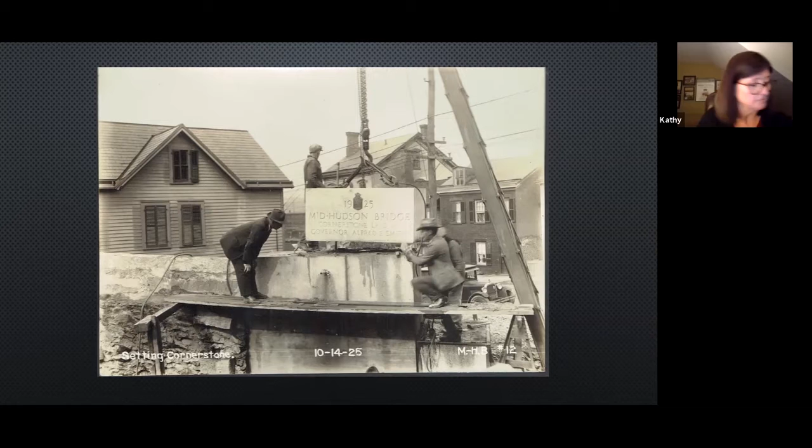This is the Anchorage on the east side of the river, just south of Kaal Rock. Kaal Rock, as many of you know, is this big boulder-looking thing, but it's enormous. They thought initially they would just have the bridge be on top of that, but they decided to move it a little bit further south.

This is a caisson, the east caisson. The caisson is used on bridge piers to build the base of the pier. What it is, it floats in. This one came in on March of 1925.

What happened was, what they do with the caisson, it's a little hard to explain, but it comes in looking like a boat, with steel sides and metal supports. As it's sunk to the bottom, there's a cutting edge on the bottom of the caisson and a false bottom. So if it goes down properly, as it sinks, they build up the sides to keep it above the top of the water. Once the cutting edge gets to the bottom, they use that to help get through all the muck, and they dig it out from the inside, because this is open on the inside. It's not a closed caisson like we think of with the Brooklyn Bridge.

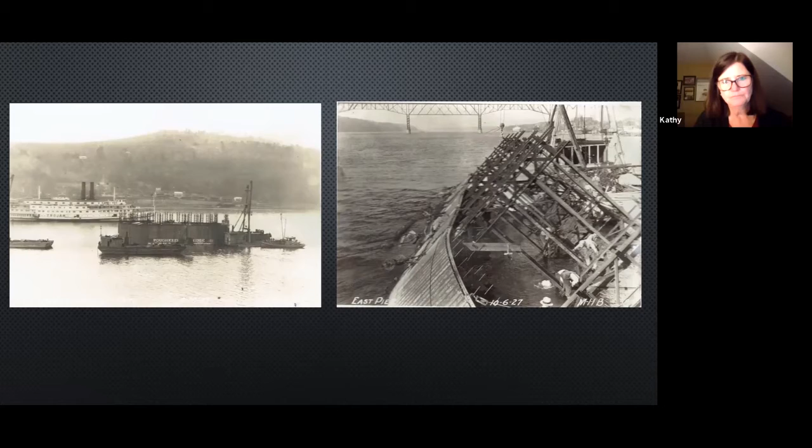So, just to back off for a minute, we have interpretive signs at all the bridges. When I was trying to describe this, I had an engineer do a diagram of it so it could be better explained. If you look at this diagram, this is pretty much what happened. The bottom of the Hudson, we all think it's like a swimming pool, but it's not. It's got all kinds of crevices and valleys, and it's not flat, obviously.

So as it goes down, the caisson had gotten stuck in here. Over the course of almost 2 years, they had to do what's called a car float here, and we have the barge on this side. The barge was trying to pull up this way, pulling that way here. In the meantime, they have equipment and men down there digging out from the inside to right this caisson. Now, this took quite a while.

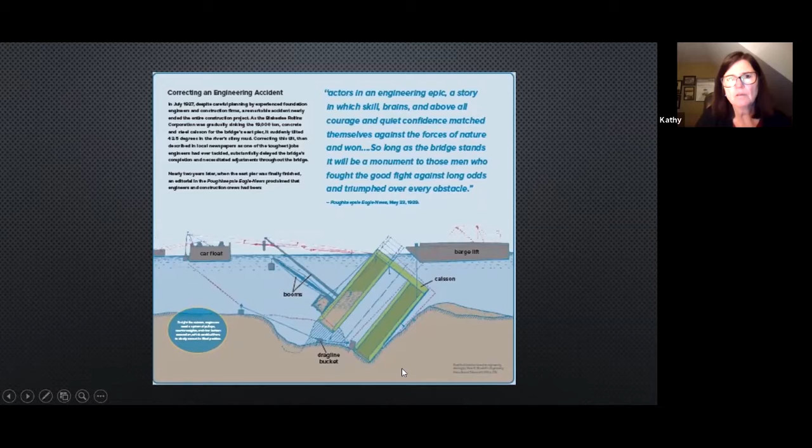You'll see that it tipped in July of '27. They had to keep pulling on it all that time through the winter, with tidal flow, river flow, ice, everything. They didn't get any movement on it until May of 1928, where they saw a slight movement. Once they saw this slight movement, they were able to keep that momentum going, so that it was pretty much straight up in August. But it took until November.

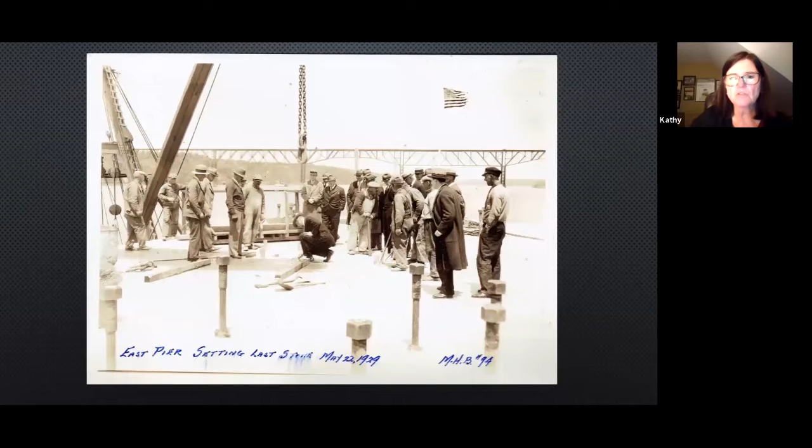It took until November for them to get it to the point where they could start to fill it again. Then, of course, it was winter with ice, so they held off until the next spring to finish it up. As you can imagine, there was a big ceremony, flag, all the important guys around, laying the last stone on top of the pier. In the meantime, the West Pier had been completed back in June of '28, so it was waiting for a long time.

But this we refer to as a Herculean effort. It was an engineering epic, they called it in the engineering review. But if they had not been able to right it, they would have given up the project.

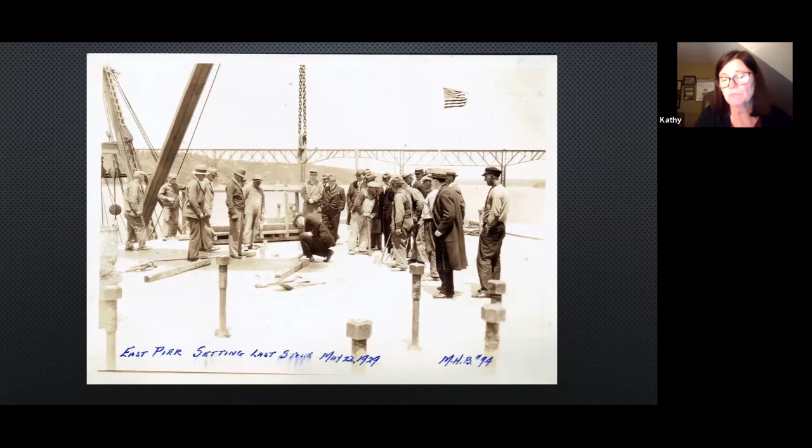So they were laying there waiting all this time and should have been installed, but they had to right the caisson first. Once the caisson was righted and the piers were completed, they installed those towers, they put the towers up.

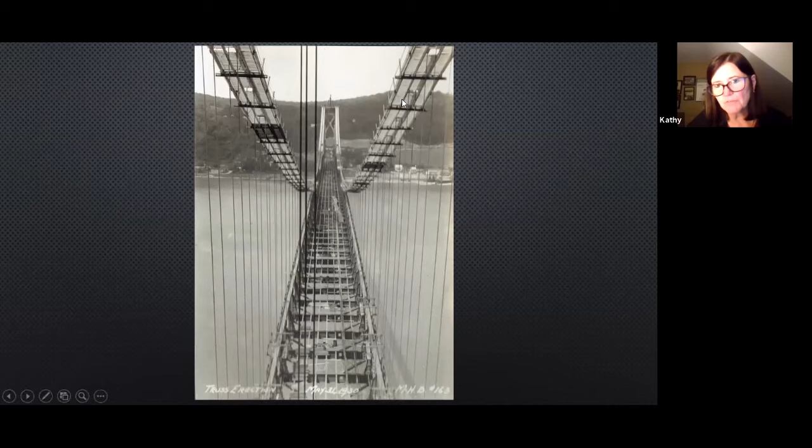Once the main cables - right above the footbridge here - are complete, then the suspender ropes are attached and dropped on the Mid-Hudson Bridge. I'm sure you've all been across the Mid-Hudson Bridge. Those truss supports are affectionately referred to as the pork chops because they look just like pork chops. The suspender rope is attached with a socket to the top of that truss, and that's what holds up the bridge. You can see also the stringers making up the deck.

If you check out this date here, August 14th, 1930 - the bridge is going to open on August 25th of 1930, so they don't have much time to finish this up. But this is the concreting of the bridge. Take a look and see this equipment.

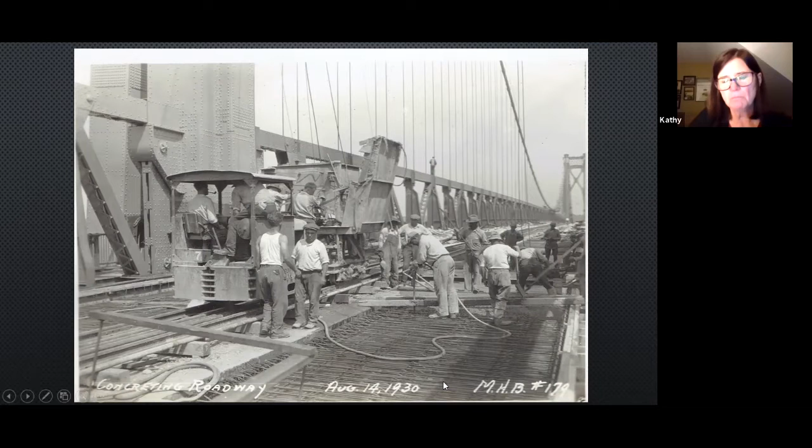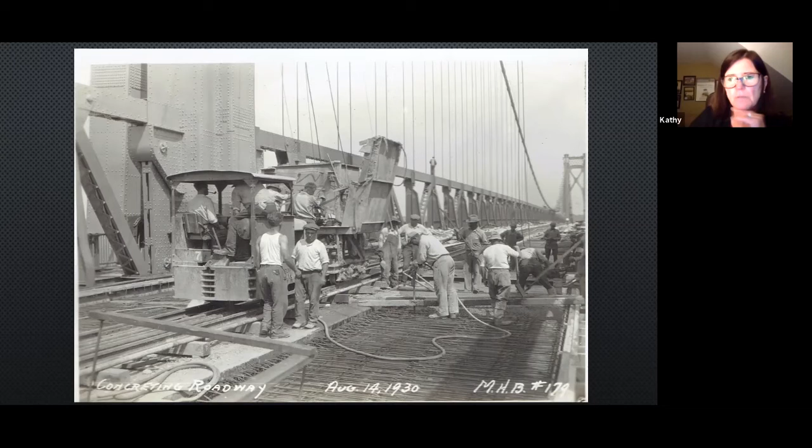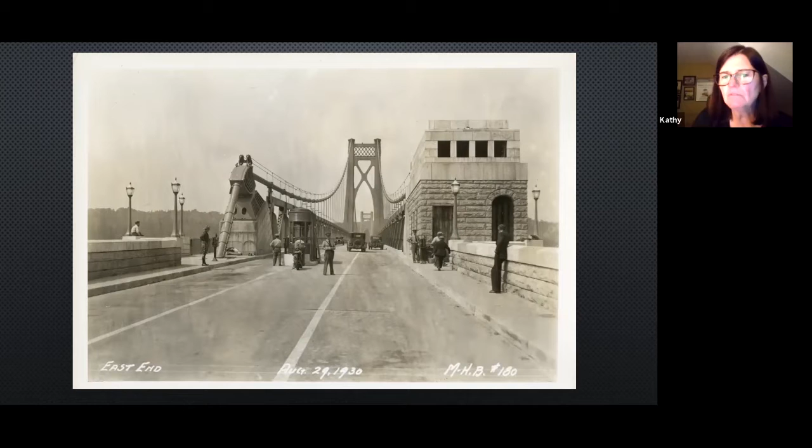And this is a couple days later when things had calmed down. Looks a little bit different than it does now, but it has really a nice old classic look to it. You don't really get to see all of those things as you go across the bridge anymore, since we have so many more efficient lights and things like that. But the toll house is still standing. Several years ago, they had to take out all of the wood and the steps from the inside due to fire hazard, but the structure is still standing.

So the Bridge Authority was actually created to fund the Rip Van Winkle. The reason they have the Mid-Hudson Bridge is in 1933 they purchased it from New York State. New York State didn't want to have to maintain it or operate it, so they decided to give it to the Bridge Authority. The Bridge Authority purchased it, and that was their first bridge.

One of the first things the Bridge Authority wanted to do when they acquired the Mid-Hudson was reduce the toll. The initial toll on the Mid-Hudson Bridge was 80 cents per car with the driver, and every passenger was 10 cents more. You actually had to pay a toll of about 10 cents to walk across the bridge. They thought that was really way too high for the average person to pay, and many people still, particularly in the winter, would walk across the ice instead of going on the bridge, or take boats and ferries instead. But the state said no, they wouldn't allow it. The Bridge Authority kept trying, but then they moved on to build the Rip Van Winkle.

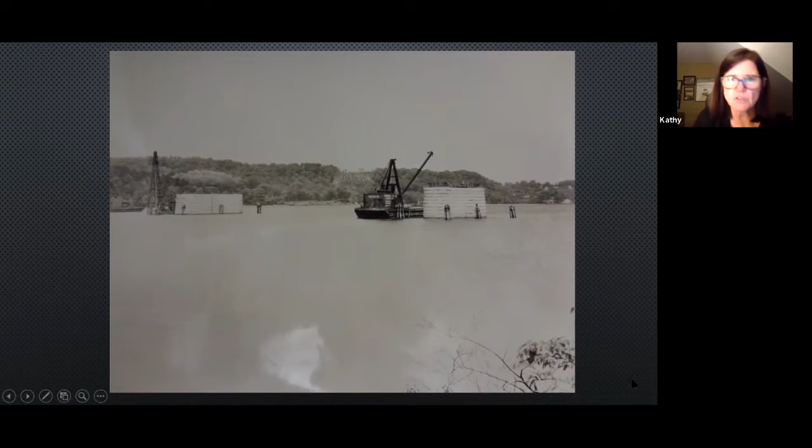Now the Rip Van Winkle is a cantilever truss bridge, and for what that means for the cantilever, here's the piers, okay, and you can see it kind of goes up this way, and then it's straight, and it goes back down. This cantilever is a little easier to see because what a cantilever is - and the next picture will show it even more - it allows for a much longer spread between the piers, particularly for the shipping channel. You want to make sure that you don't have any piers in the middle of your channel, and that allows for that.

You can see that this is kind of, it's a creeper crane is what it's called, and it literally creeps along the bridge to build the next section past where it's already been constructed.

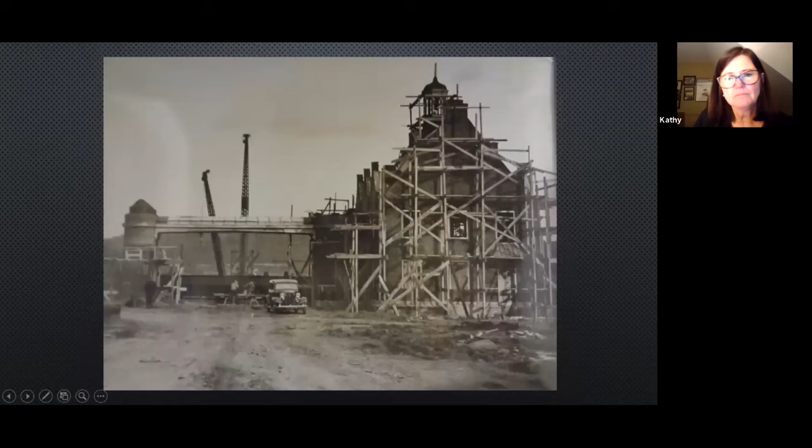So this is the administration building during construction. I'm not sure how well you could see it on yours, but right through here is where the bridge is being constructed.

Now the Bridge Authority insisted on local labor when they started the construction on the bridge, and they stuck with that, ending up with at least 75 to 80% of the people that worked on the bridge being from the area. They wanted to make sure that they were bringing in local jobs. A lot of the companies would come up out of New York City and bring their workers with them, and the Bridge Authority didn't want that to happen.

There was one strike during the time of the construction of the bridge. It was settled pretty quickly. The workers wanted more money, and the way they settled that was to give them more work hours to get them more money. The hourly rate was not increased, but they went from a 30-hour week to a 40-hour week, and they seemed to be happy with that.

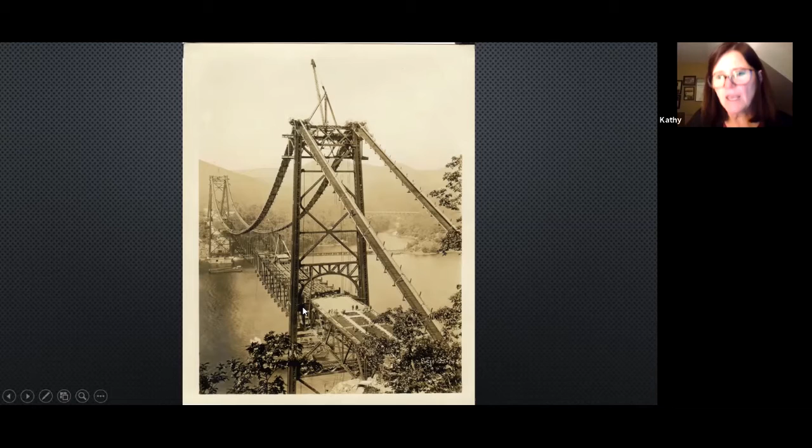This is a special feature. Again, they were very concerned about a lot of noise coming out of New York City—'Oh no, you're gonna put this ugly bridge in that beautiful area.' So they were very, very careful to make sure it had soft lines and followed the natural look. If you look at the towers with the sloping cables, it mimics the mountains around it. This mimics the entrance to the tunnels for the trains as they go underneath the bridge.

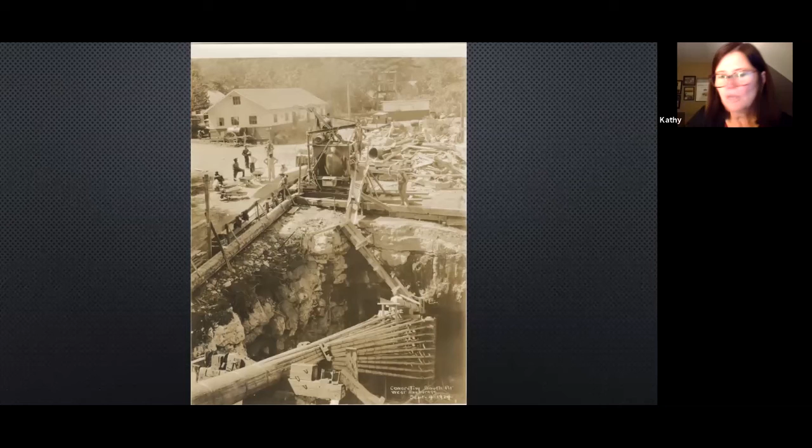Once the main cable is complete, it comes down and you can see that it's all wrapped here. They bring it down and it ends up being separated again into clusters and attached to eye bars—kind of like a long metal stick with a circular thing on top for it to be connected to. You'll have an eye bar connected to an eye bar, connected to an eye bar, connected to an eye bar, and those can be buried deep underground and then cemented to keep it a tight, firm anchorage.

It looks like it's right on the edge. If you looked at the administration building for the Bear Mountain Bridge, the anchorage—actually this part that's buried underneath—is on the far side of the building from the river and way underneath the building. So it's pretty far down.

The toll house on this side by Peekskill—that toll was not for the bridge itself, but for the road, and they needed that for insurance in case there were any casualties on the road.

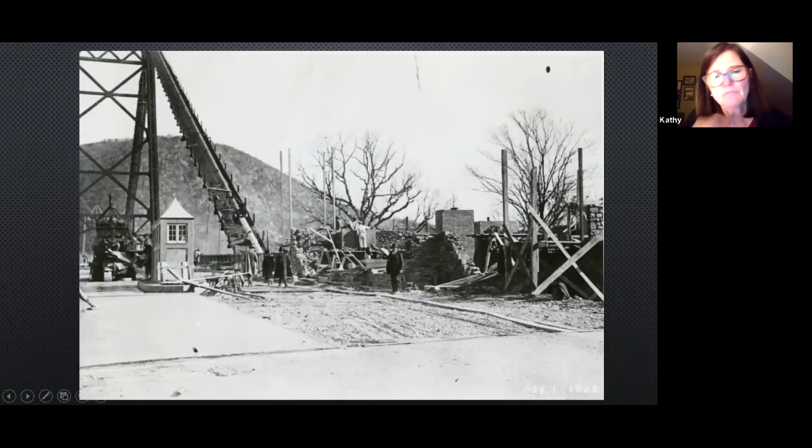This photo shows the bridge almost ready to open. They're just about to take down the footbridge, the toll booth is all set, but the administration building will not be completed when they open it on Thanksgiving.

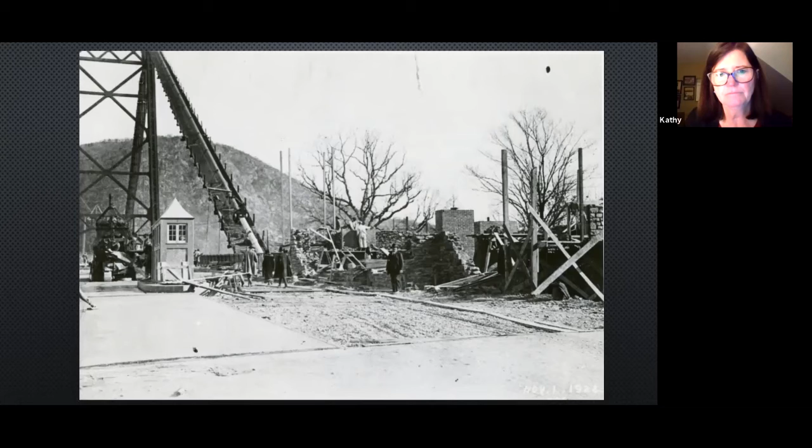Here it is in December—you can see it's still being worked on.

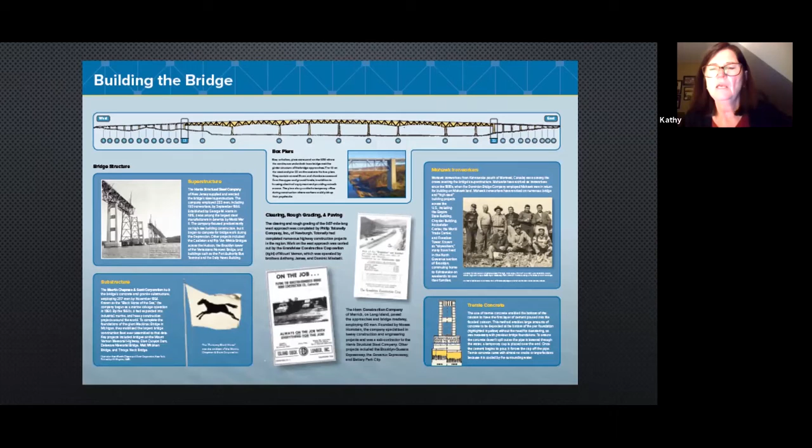The Kingston-Rhinecliff had Mohawk iron workers who did a lot of the high tower work.

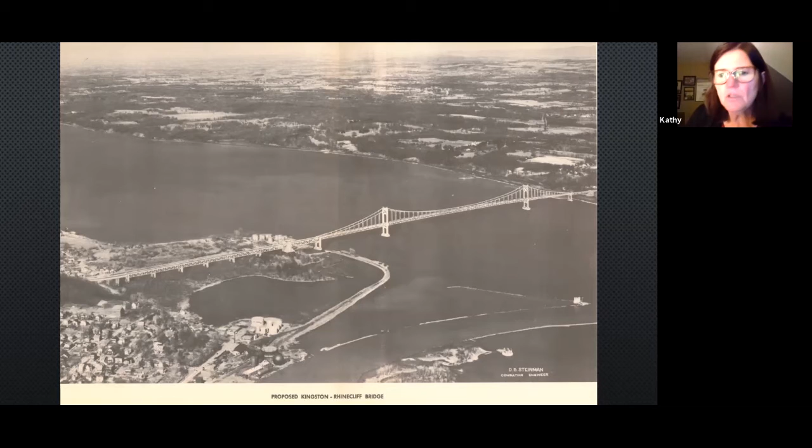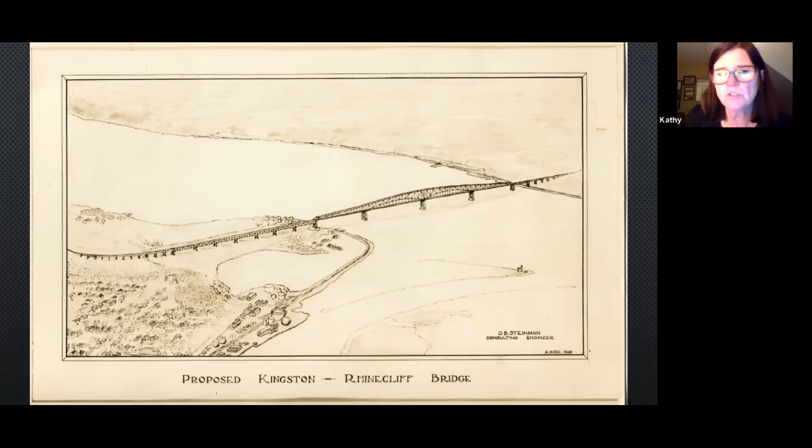Now this is the original design for the bridge. It was supposed to be a suspension bridge, designed by D.B. Steinman, meant to go from the end of Rondout Creek across to Rhinecliff—that's why it's called the Kingston-Rhinecliff Bridge. I always thought it was just a suspension bridge design, but I just found last year that he also had designed a possible truss bridge.

They moved it about 3 miles north. At the time, during the middle 1950s, with the development of the interstate, the idea was to connect 87 with the Taconic, much like Route 23 connected to New England.

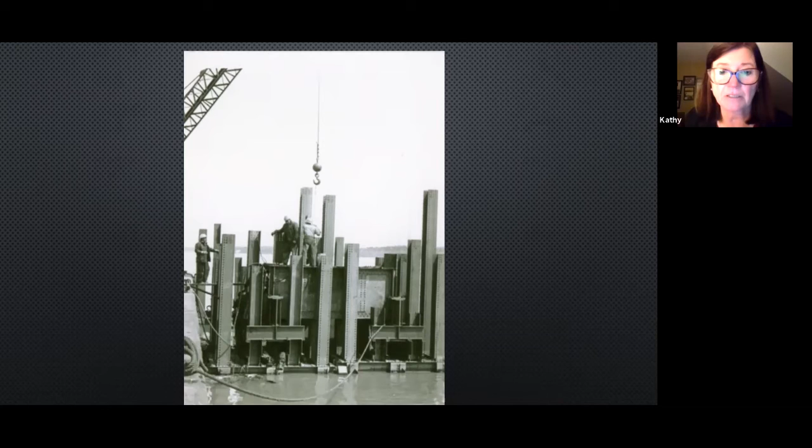Here's a caisson for the Kingston-Rhinecliff. You can see them hammering in the H piles and getting that all set up. They used what they called tremie concrete.

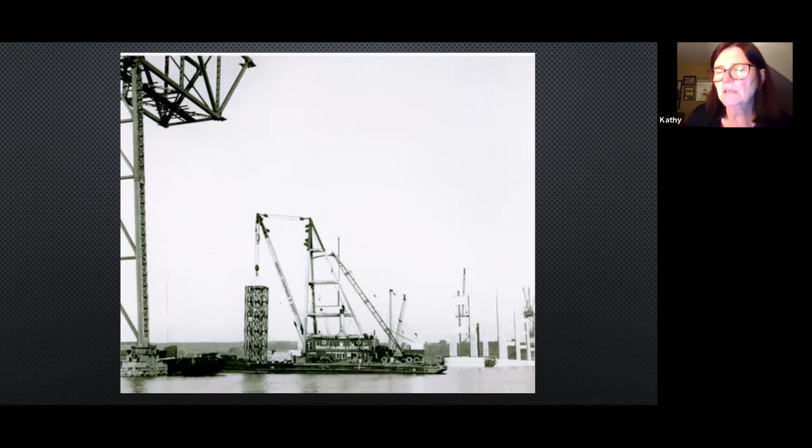It was the first time piers on a Hudson River bridge had been poured into the water, and it cures a little differently—it doesn't crack as much, and it keeps it cooler.

These are some of the iron workers. As you can see, this is way before most of the safety protocols they have now.

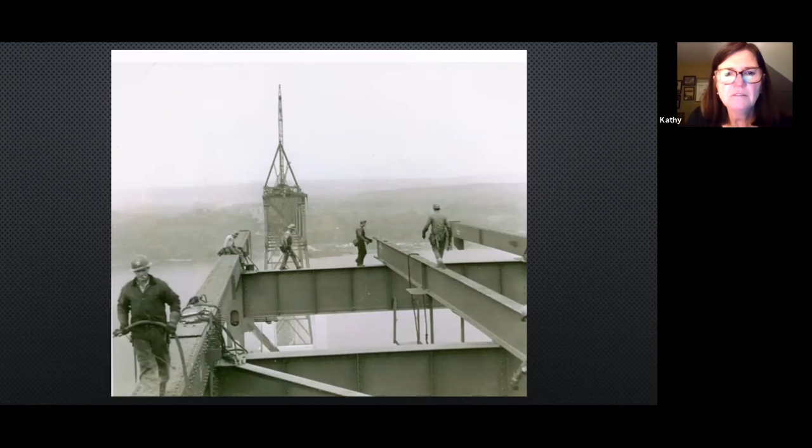I thought this was a really cool looking picture—you can see where they're connecting. What they did was build the truss on top of the pier and kind of cantilever it to the next one.

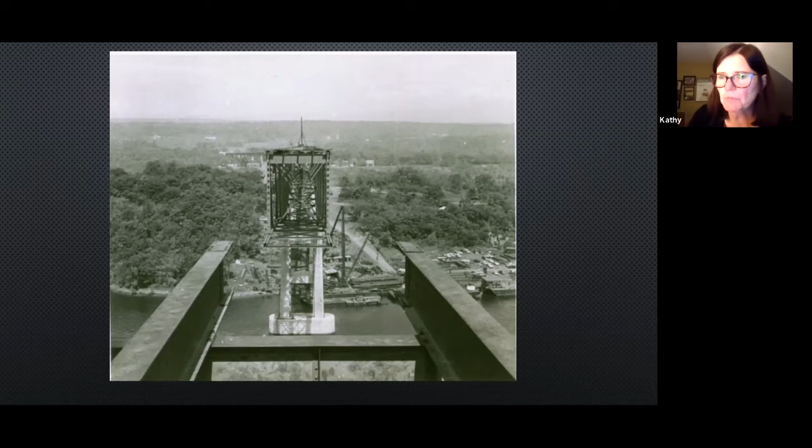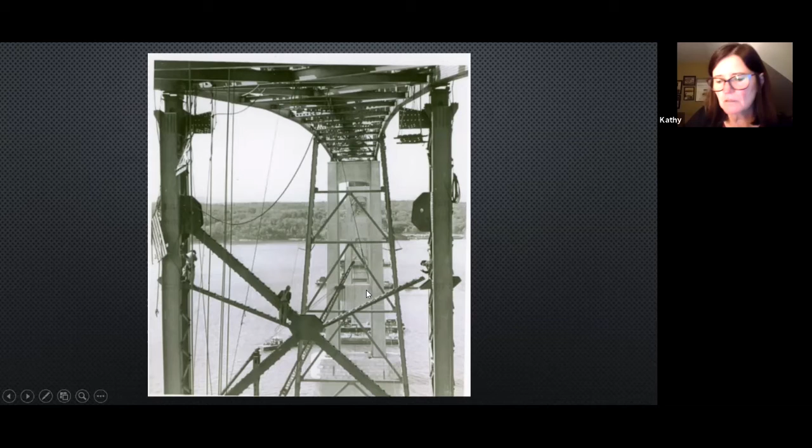More really cool pictures—there's the false work here helping to support in between the piers. You can see that there.

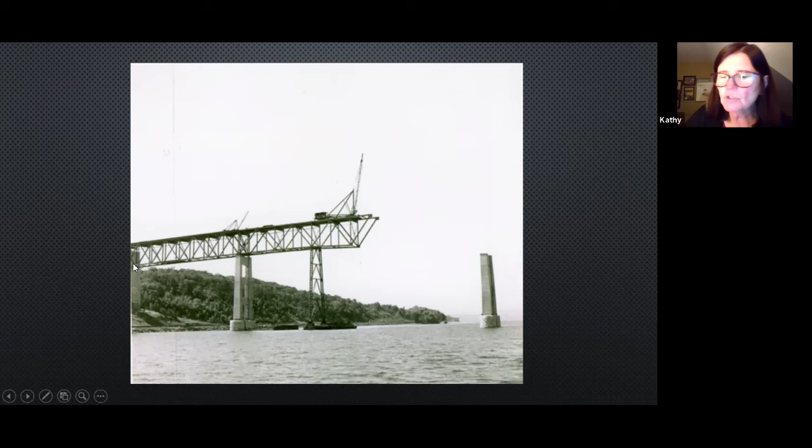I want you to take notice right here—I'll show a better picture in a second—but this is called a box pier. There are two box piers in the Kingston-Rhinecliff Bridge, serving a couple of purposes, one being that it has to connect this really deep underdeck truss to the girder section coming off the approaches. You'll see that in a second.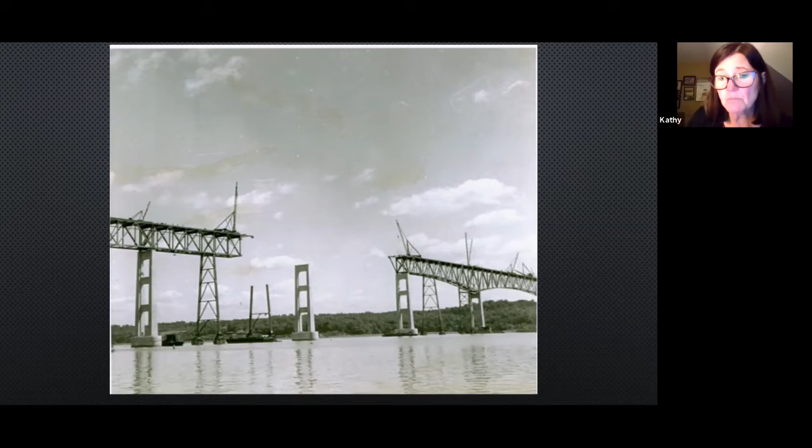Here's some more—they just work their way across the river connecting the piers. The Kingston-Rhinecliff Bridge was the longest underdeck truss bridge in the world when it opened.

So our bridges are actually pretty impressive. Here's the box pier—as you can see, here's the girder section. If they had just a regular pier, they never would have been able to connect the truss section, which was so deep, with the girder section.

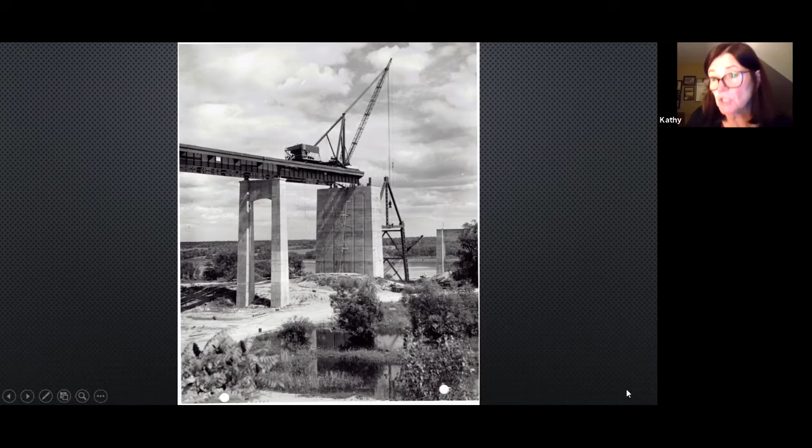The other thing about this pier is it's hollow inside, so there are rooms in there. During construction, the men would go in there to get their paychecks—so that was kind of cool.

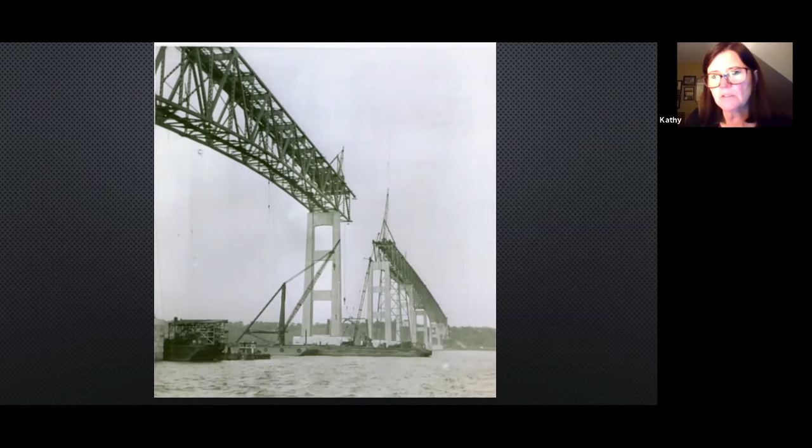And here's more, finishing up, meeting in the middle. There are actually two channels on the Kingston-Rhinecliff—one major one on the east side, and a smaller channel on the west side.

I've always thought the Kingston-Rhinecliff looks better from underneath than it does from on top.

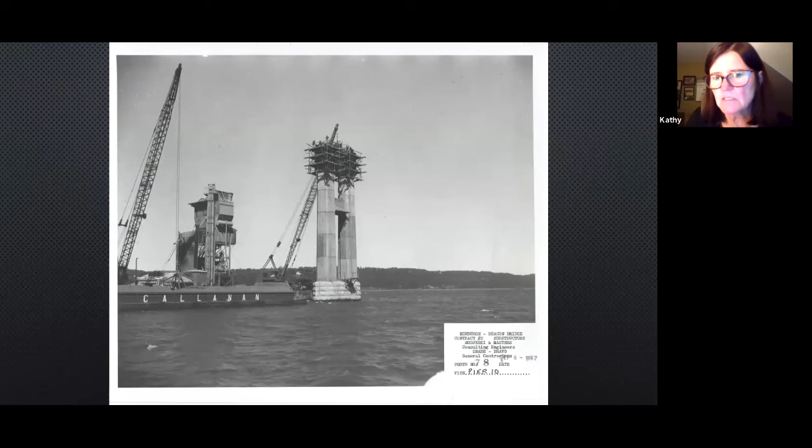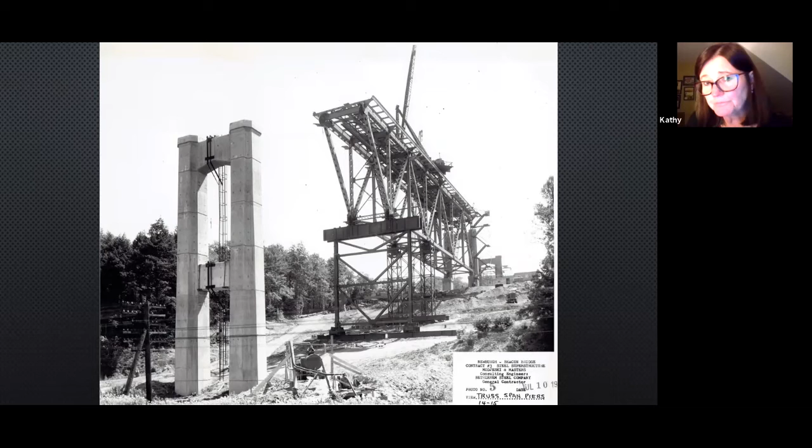This, for people in Kingston, this company should look familiar. Here's the piers, and this is where you start to see now these huge cranes and barges and a lot different technology. Although the north span was the end of an era in many ways, they still used rivets to put the original bridge together. It's about that time in the 1960s where they started to switch over to high tension steel bolts. But you can see it very similar to the construction of the Kingston-Rhinecliff with the truss sections. Again, they would start at the pier, use the false work, and build out from there.

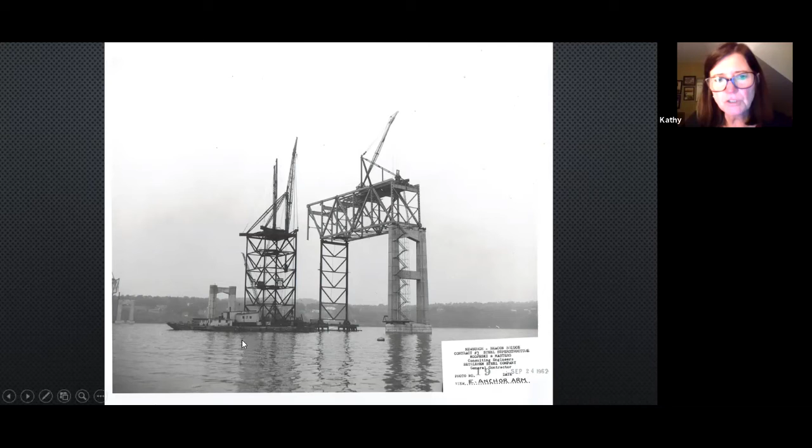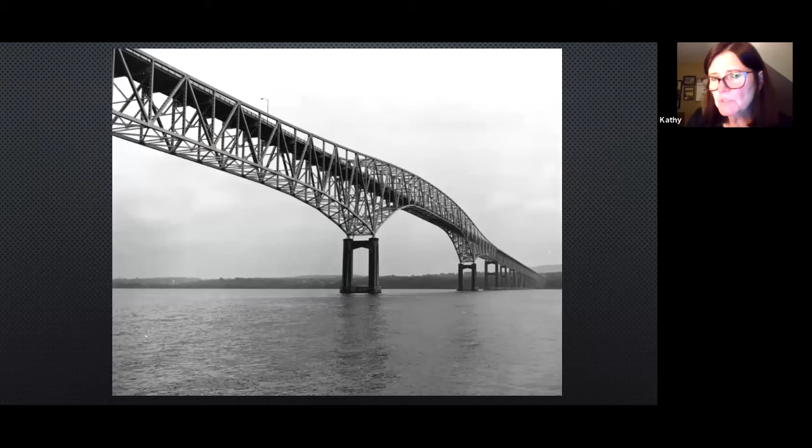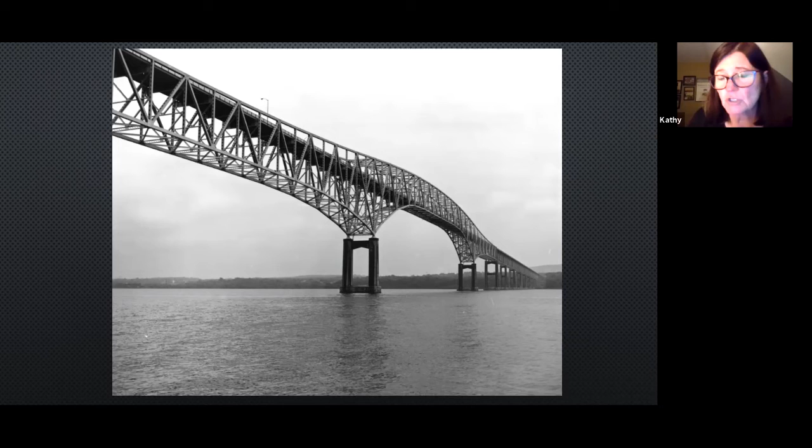And it was actually a very beautiful structure. It was originally silver. I don't know if any of you are old enough to have driven across that. I had to drive across that to go to college, actually, and anybody that complains about going across the Newburgh-Beacon now because it's so narrow, I just have to tell them that's crazy. Going one way with an 18-wheeler coming at you on a 2-lane bridge, nothing like it. But it was an award winner - the American Institute of Steel Construction had awarded the bridge. It was awarded for its beauty, got a meritorious award for a beautiful structure.

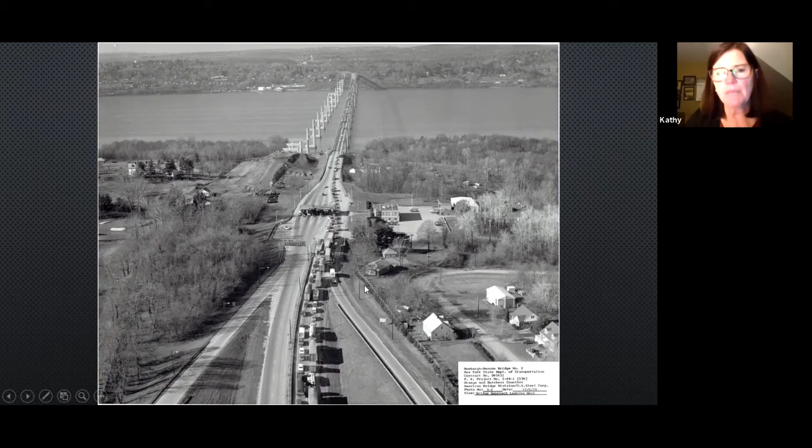I'm showing you this because this is a caisson. It was built on the shore. Steel Style is still a company that's in Newburgh - they built this caisson. This caisson, when it was put in place, tipped. Technology being what it is, it only took 3 weeks to fix this one.

I had an engineer help me with a diagram here. What happened, here's the caisson, this is water, and both of the cranes are floating on a barge. What they're supposed to do - remember we talked about the caisson going down - it's supposed to pull out the sediment so that the caisson can go farther, and it settles down not necessarily on bedrock, but on secure surface. What happened was one of the cranes broke down and the other one kept going, so of course it tipped. So what they did was put in the H piles, all underwater, H piles down there, and then they had a hydraulic jack that pushed back on this while the crane that broke down was emptying it out. And 3 weeks later, they were ready to go.

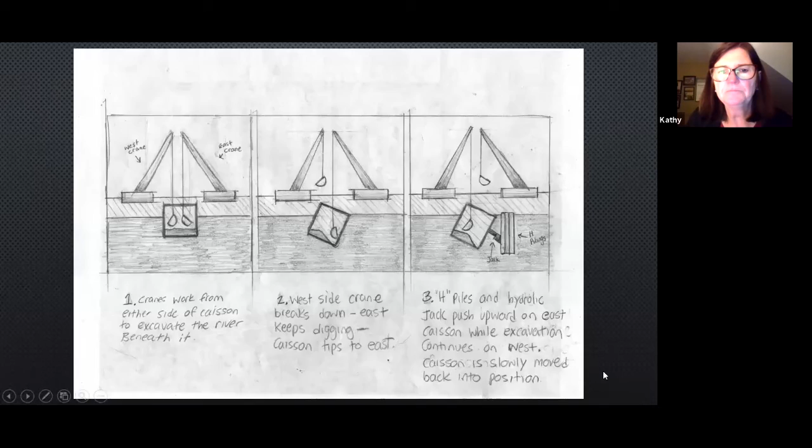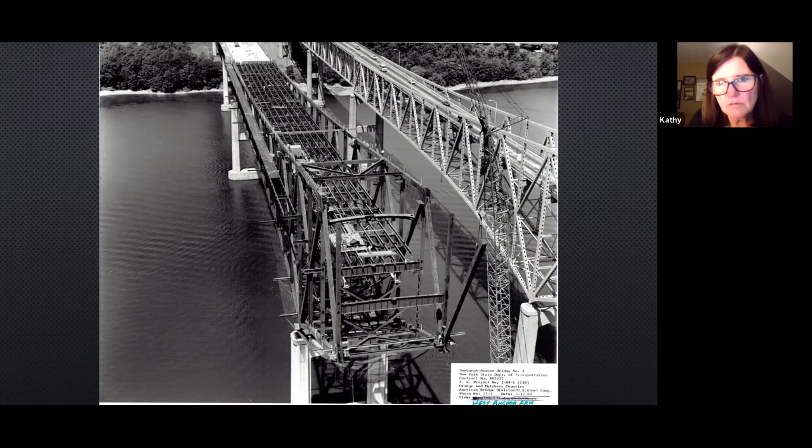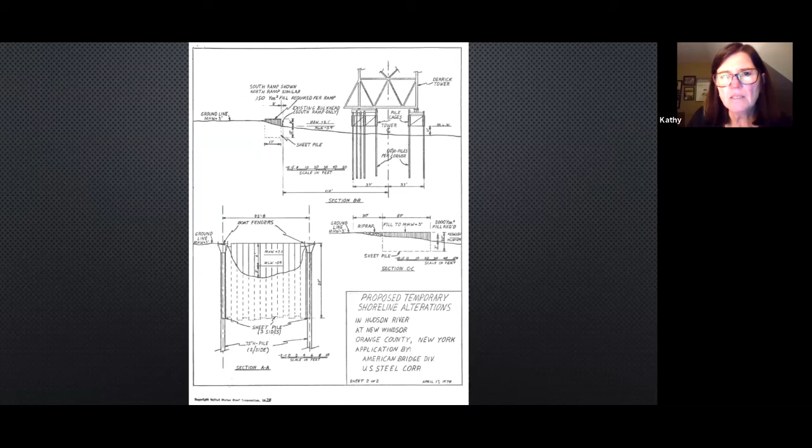Another cool structure picture. One of the other differences about the Southspan, which is really pretty cool and is pretty much how bridges are built today - you could see all these, that was all built in place. But what they did for the Southspan was they had an assembly yard that was constructed, and this is the permit for the assembly yard. So this kind of gives you some idea of what it was like. The assembly yard was used to construct sections of the bridge, and about 30% of the structure was assembled out here, floated up the river, and then set in place on the bridge. It kind of shortened up the construction time.

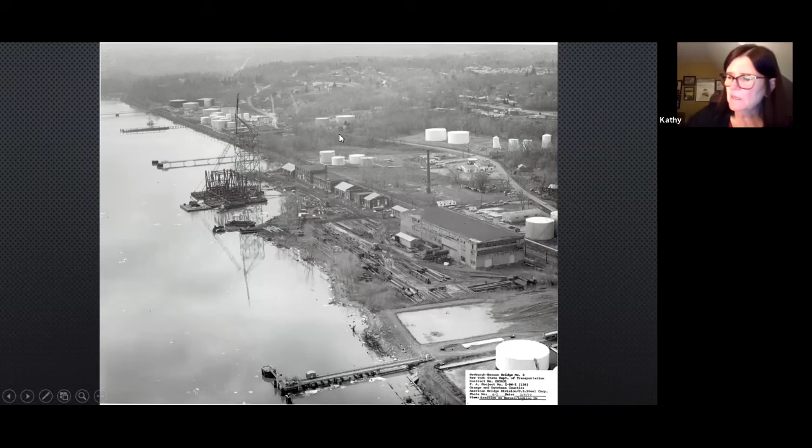This is River Road here. If you know Newburgh, all the restaurants and everything are way up this way.

This is a pretty classic picture of lifting in the last section. You can see it's on a barge, and then they would just lift it into place. One of our engineers who's still with the Bridge Authority, George Fong, was a young guy when he came up to work on this bridge, and he said he was standing right up there. George and two other guys were standing right up there, if you can believe that.

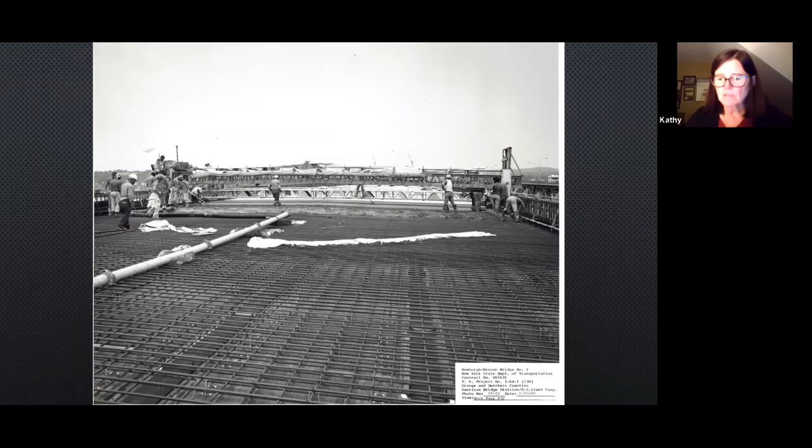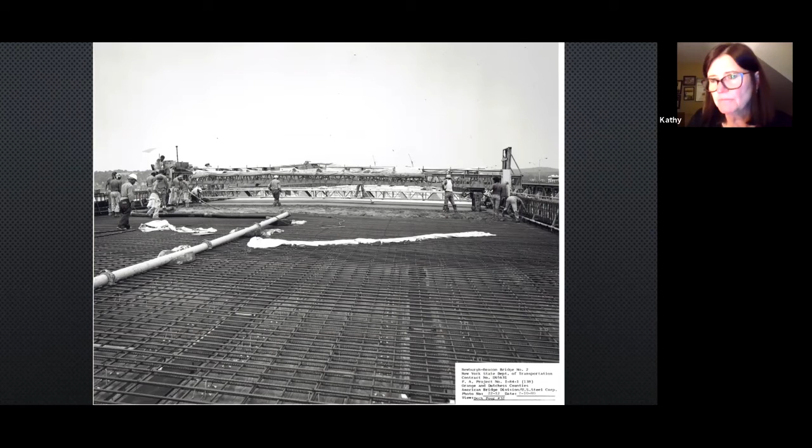Again, we've talked about the new technology—that's a whole lot quicker to concrete this bridge. And you can notice it's actually a 4-lane bridge: there's 3 lanes for travel and 1 breakdown lane.

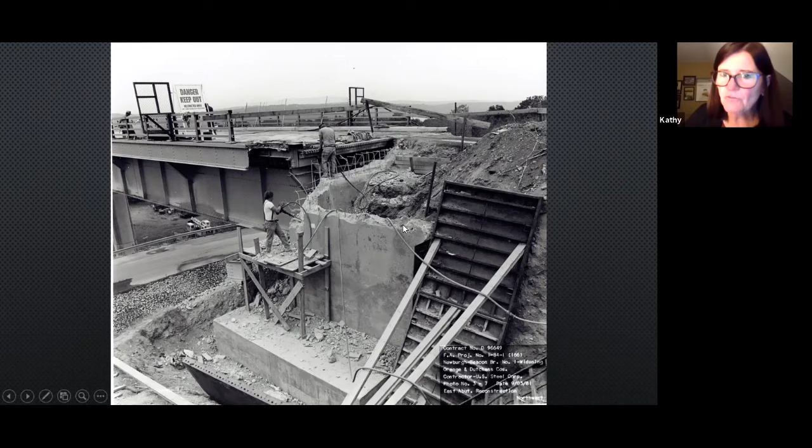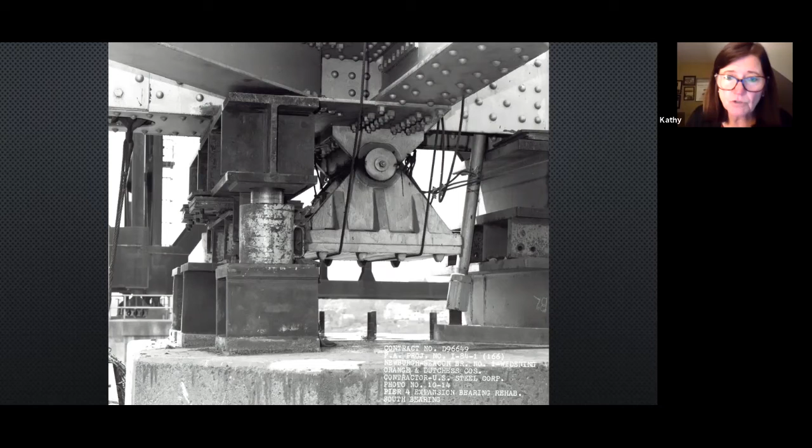Once the South Span opened, pretty much right away, they closed the North Span and widened it. In order to widen it, you have to change the abutments, which secure the bridge to the land on either end. This was not sufficient for 3 lanes, it was just for the 2 lanes. So they redid that—they redid all the bearings. If they were not functioning, they took them out for new ones, or they just reconditioned them.

I like this photo because you can see the original bridge was silver. The South Span was built of Cor-Ten steel that was not supposed to rust. It didn't actually prove to be as good as it was supposed to be, so they did end up painting it eventually. But you can see the new steel, and what they did was go through the truss and add reinforcements so that the force on the bridge was sufficient for the 3 lanes.

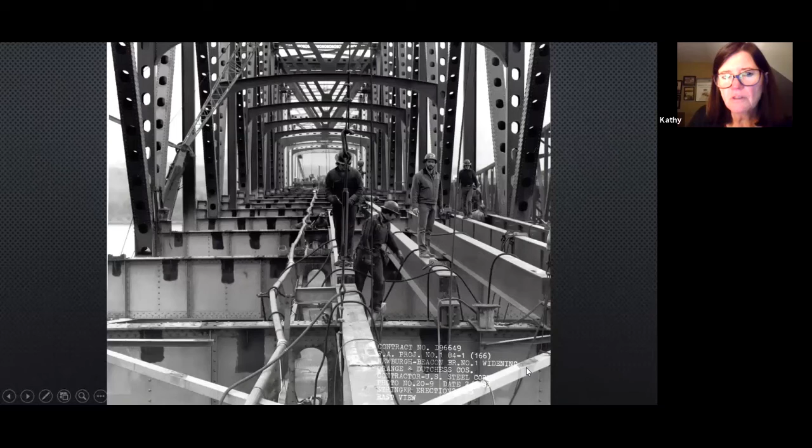This kind of helps show what they had done to make the wider lanes: on this section they cantilevered out from the deck some additional width. So it's not just the roadway that's stuck out there—no, it's more steel that's cantilevered out. You can see that a lot of the stringers were added, more on top, or reinforced.

Within the through section of the bridge, there was no walkway there anymore—they went right to the steel with the roadway. That's how they were able to widen the bridge without widening the through truss.

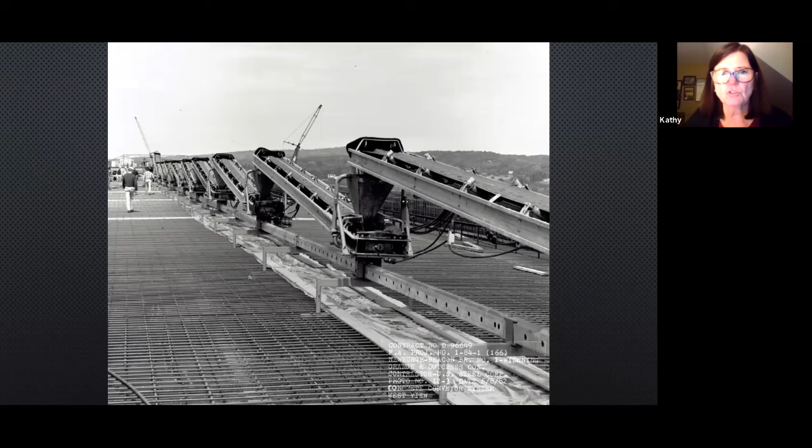Pretty nice contraption for concreting the roadway. And wouldn't you love to be this guy?

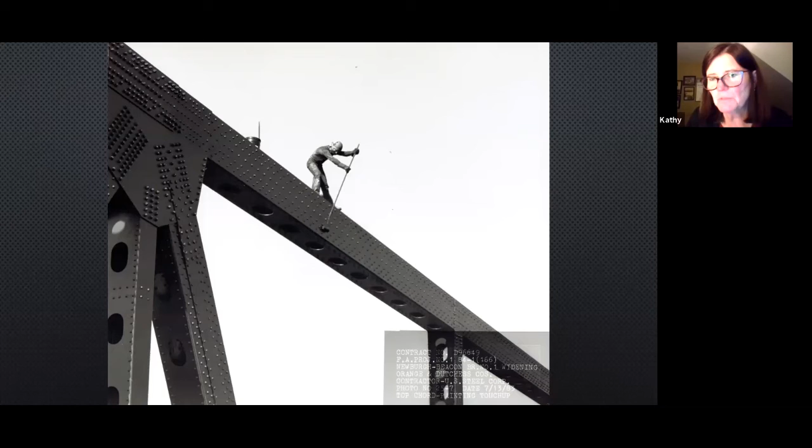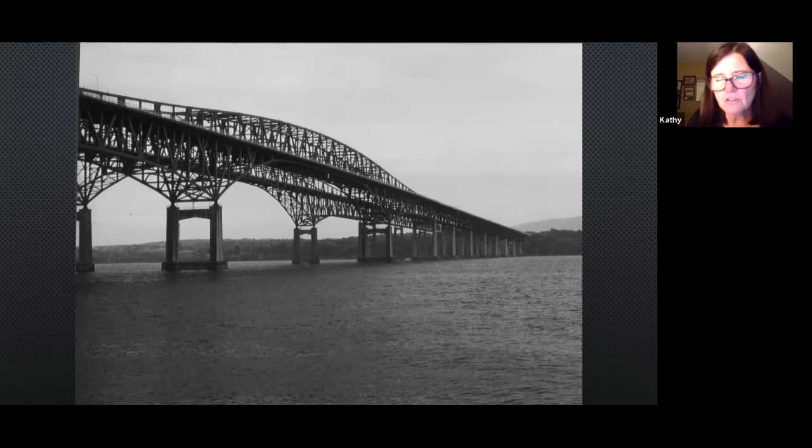What they had to do, obviously, to make it twin spans—when they finished the widening, the last thing they did was paint the north span brown to match the south span. And there's the twin spans, more fraternal than identical, obviously, but the twin spans of the Newburgh Beacon.

The Bridge Authority is known for maintaining their structures, some of the best maintained in the country. People don't appreciate it when they're stuck in traffic, but they do keep the bridges in great shape. This is the redecking of the South Span, done around 2007, maybe 2012. They used prefabbed concrete slabs that came in, which they thought was going to be a better way to do it.

But when they went to do the redecking, the project that's right now, which you can see here—this is what they're working on—they had to strip all the way to the steel. They checked the steel, made sure nothing needed to be repaired. And this is being poured in place.

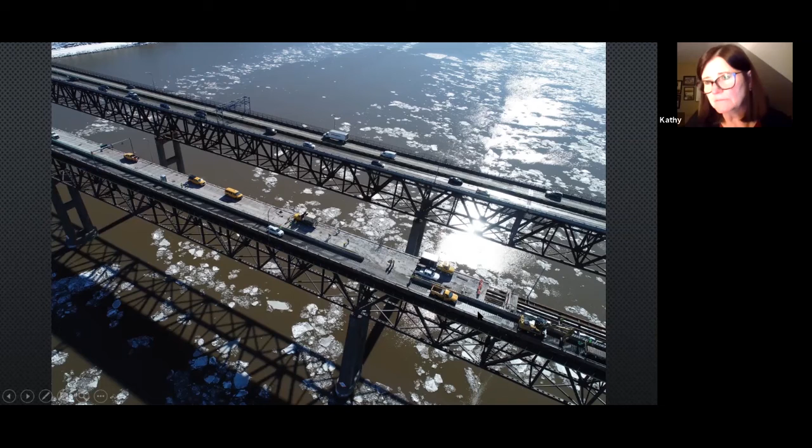With the South Span, as I said, it was a full four lanes, so even while they were putting in the panels, they still had enough laneage to keep traffic flowing. Because this bridge is narrower, they really only have the one lane, so that's why they went with the poured concrete instead of the other method.

And that's about it. I think I did it, Sarah. Did I get it? Yep. Under an hour.

But if you have any questions—I know there's all kinds of stuff I have in my notes here that I didn't get to—but the bridges are pretty amazing.

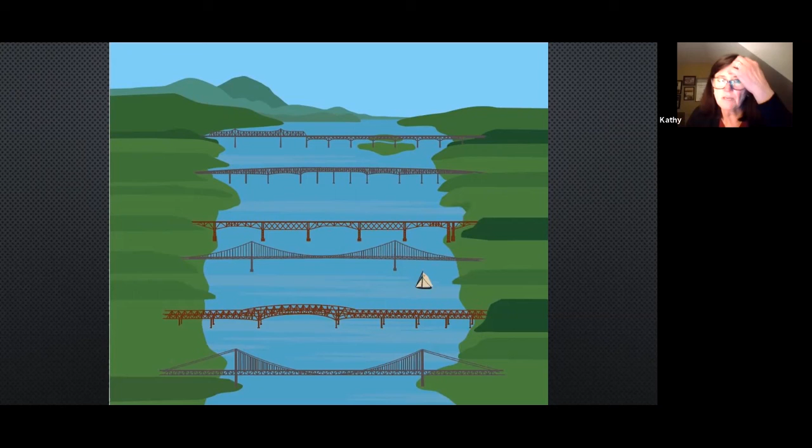Each of the bridges are different colors - the Rip is similar to the Mid-Hudson. But no, I don't think it's a problem with matching. They're pretty good at long range planning. The Bridge Authority has short-term maintenance that the regular crews do, with crews on every bridge, and then they have long-term plans - a 5 and 20-year plan they work on with general contractors for redecking, repainting, and major stuff. But touch-up is always done by the regular maintenance guys, and they do that every year.

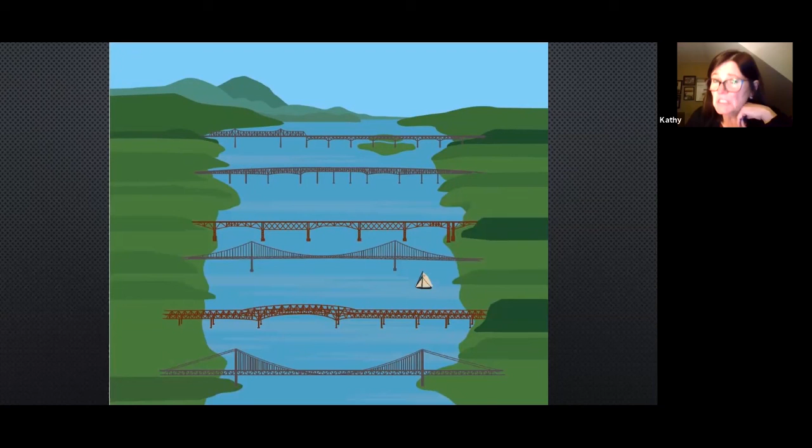The first thing they do in the spring is wash down every bridge. You'd think, well, all that stuff's going in the river - and when it rains, it does go in the river anyway. So it's really just a case of getting the materials and dirt off the bridge. It's really made a difference in keeping these bridges in good shape, to the point where a lot of other authorities are doing that now.

When I was studying the Kingston-Rhinecliff, it's only 2 years older than the Tappan Zee, the original Tappan Zee. In my first book, I covered the construction of the Tappan Zee and the George Washington, and a lot of the contractors came upriver from doing the Tappan Zee to doing the Kingston-Rhinecliff. The Kingston-Rhinecliff is still in fine shape, so there's more to it than just the bridge not being in great shape at the TZ - they needed more bridge there.

But do we really want to replace bridges when you can keep them in good shape? So far in the Hudson Valley, we're doing okay. At some point they're going to need more because we're getting more and more population. But I just keep saying, more people pick up a cup of coffee on their way to cross the bridge, and it costs more for that cup of coffee than the toll. So as far as I'm concerned, that's money well spent.